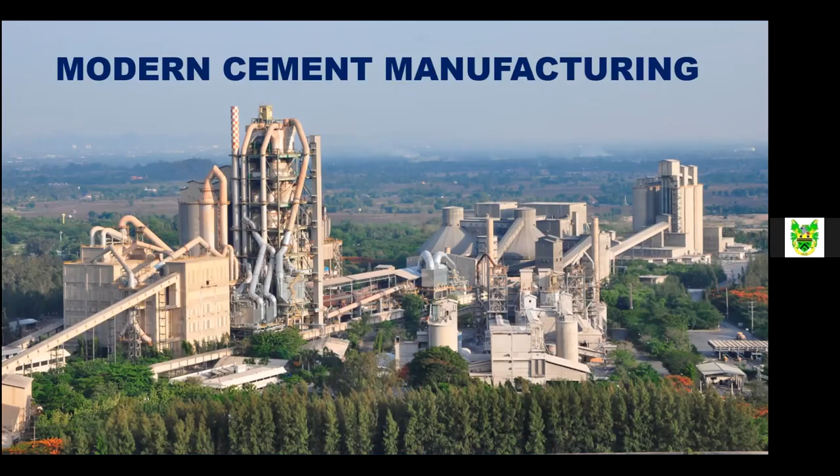Good morning, guys. As Henny says, I've been in this industry for pretty much all my life, 45 years of working. And you're never too old to learn, because I found out the other day from Henny that there are apparently 330 billion particles in 1 kilogram of cement. So I'm learning something new from Henny, thank you, Henny, about that.

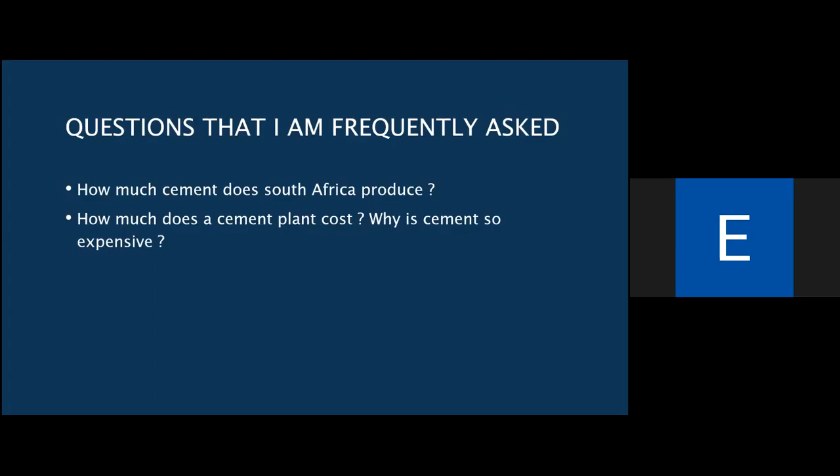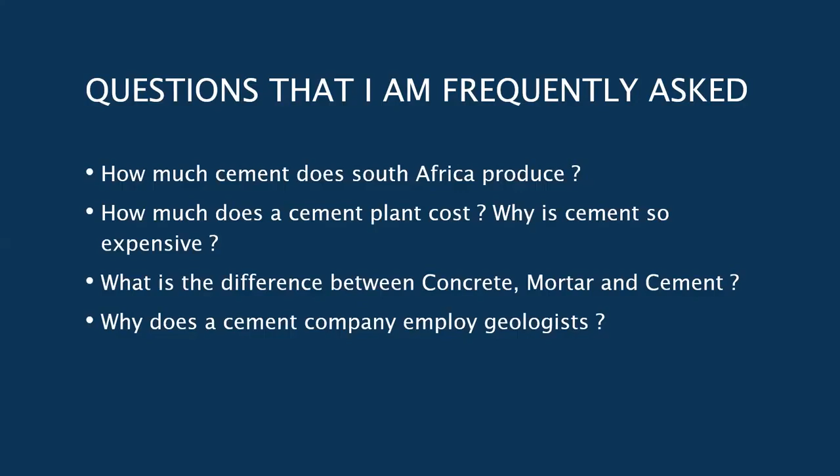So, questions that I'm very often asked. First of all, how much cement does South Africa produce? Secondly, how much does a cement factory cost? And then, really, why is cement so expensive? This question comes because a lot of people feel you simply dig up some limestone, crush it, and sell it as cement, and make one hell of a lot of money. So we'll talk a bit about that today. And then, what is the difference between concrete, mortar, and cement? And finally, a lot of people ask me why a cement company, or cement companies, employ geologists. What has geology got to do with cement? So I'll try and answer those before we run through the process.

How much cement do we produce? Well, South Africa has a cement capacity - I've underlined capacity because not all of this is utilized today, it's an existing capacity - of 21.7 million tons. If we look at that in terms of world production, we're sitting fairly down the line. South Africa's 21.7, we're not too bad, because below us is the United Kingdom at 9.4. But just look at this other guy up here, that's China - it produces huge amounts compared to anybody else. The second is India, which doesn't even come to a third of what China produces.

What does a cement plant cost? Well, the latest figures are it costs 2 billion rand per million tons of capacity output. The last two factories built in South Africa - Sephaku, of which I was part, built in 2014, sits near the Lichtenburg area, produces 2.5 million tons, cost 5 billion rand. And then Mamba Cement, up near Thabazimbi, that cost 2.5 billion rand.

Just as a side issue, Sephaku Cement is 64% owned by Dangote, a Nigerian gentleman. As a story, he, at the age of 21, started a business by borrowing $3,000 from his uncle, and took 3 weeks to pay that back. He is today the wealthiest man in Africa, with a fortune of 14.1 billion US dollars. Not too bad, eh? The other thing is that lead times in the industry are very long.

It takes at least 6 to 9 years from conception of a plant to the completion of it.

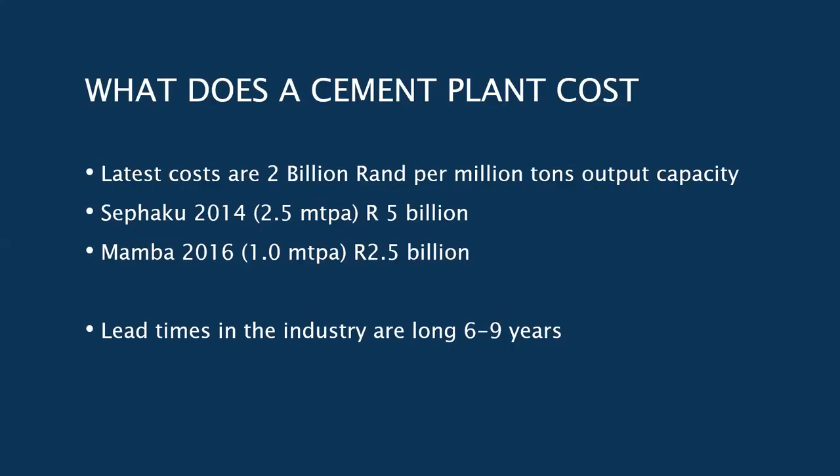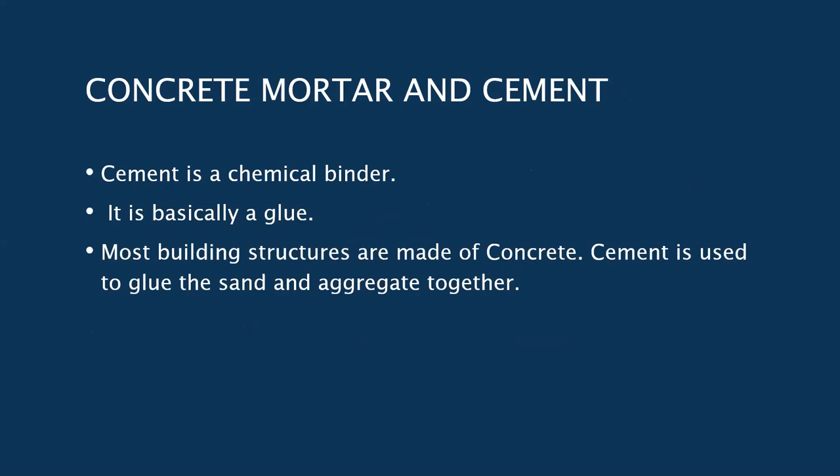The differences between mortar, cement, etc. Bear one thing in mind: cement is just a chemical binder. It's actually purely a glue, that's all it is. All the building structures you see are made of concrete. Cement is just the glue that sticks together the aggregate and the sand. Mortar is just some sand and cement, and again here the cement is purely and utterly the glue that holds them together.

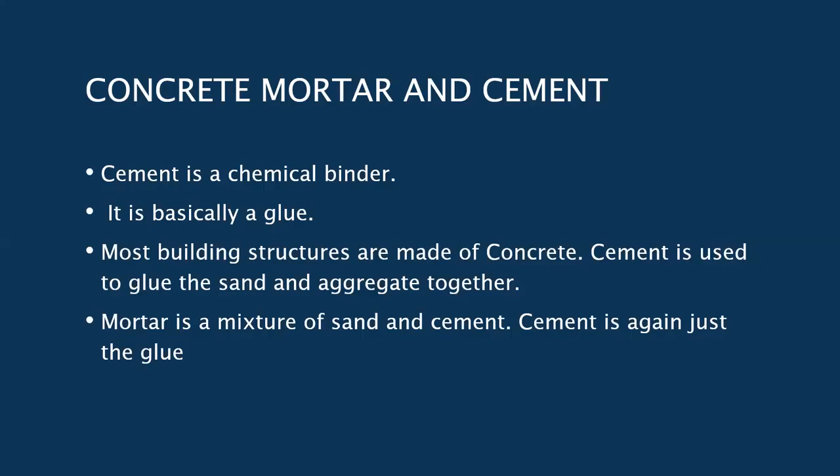So why does a cement company employ geologists? Well, bearing in mind that cement is not something you dig out of the ground—a lot of people seem to think that. They think cement's very expensive because you just dig it out. It's not, it's a manufactured product, manufactured from a whole variety of various raw materials. These raw materials all need to be located, and they all need to be mined, etc.

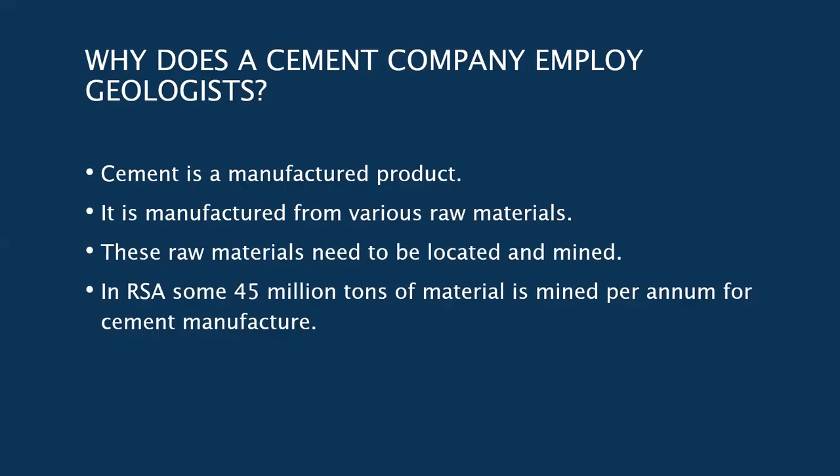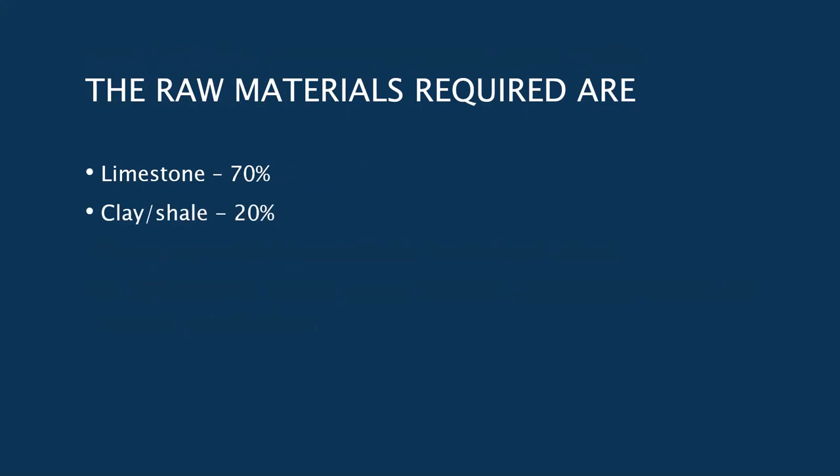In South Africa, about 45 million tons of material is mined every year for cement manufacture. The raw materials we use in cement are limestone, as most people would guess—that's the high proportion, about 70%. Clay, shale, that gives us the alumina component. Iron ore gives us some iron to add to it. Gypsum, and the gypsum is added after the process, I'll discuss that a bit later.

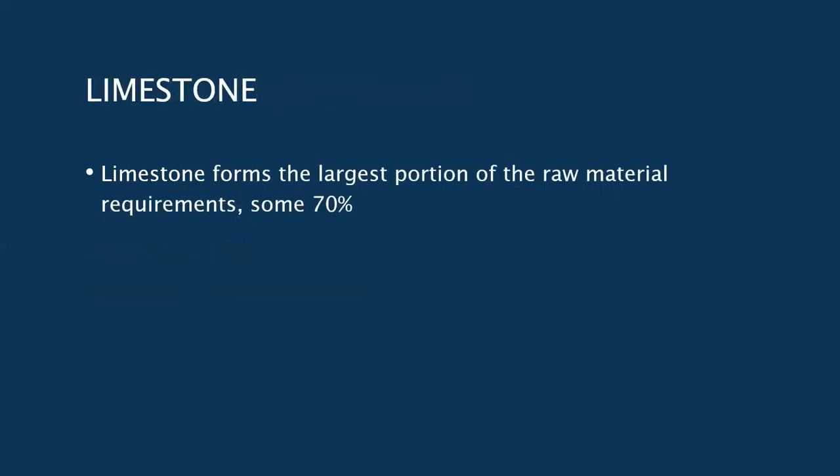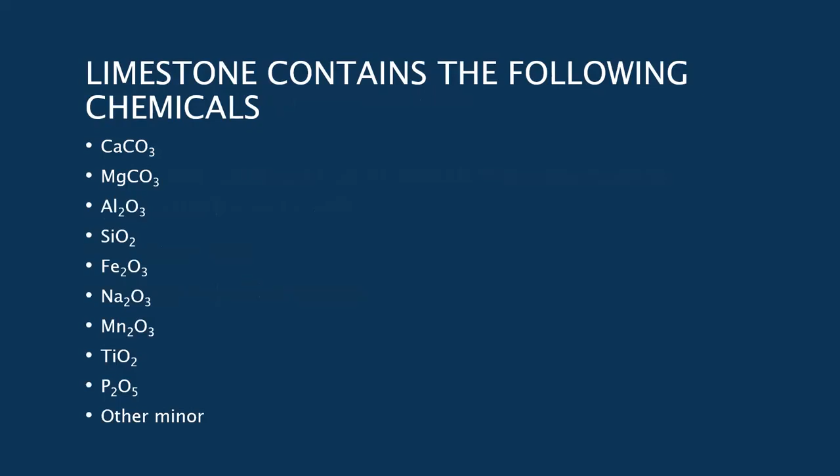Limestone, as you can see, is the largest portion, about 70%. Now limestone is made up of a whole variety of minerals, including calcium, magnesium, alumina, silica, iron, etc., and other minerals. So, as we said, cement manufacture is really a chemical process, and therefore limestone suitability is determined by various chemical ratios and maximums.

Now, the interesting thing here was, at university, my very worst subject by far was chemistry. And yet I've spent the rest of my life in the chemical industry, because everything about cement is chemistry. Geology—nobody cares what you call the thing, as long as the chemistry is correct.

So how do we know what is a good limestone? Very often people think that a high-grade limestone is a great limestone for cement. The answer is no, that's not very much the case. Here we've got the components we're looking at.

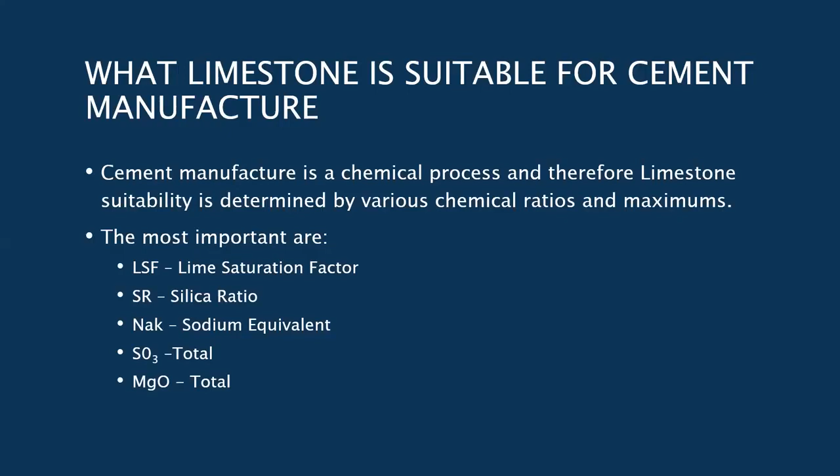In the cement industry, we call something LSF, the lime saturation factor; silica ratio; NaK, the sodium equivalent—I'll discuss these a bit further—and SO3 total. Those are the factors which determine whether the raw materials are suitable for cement.

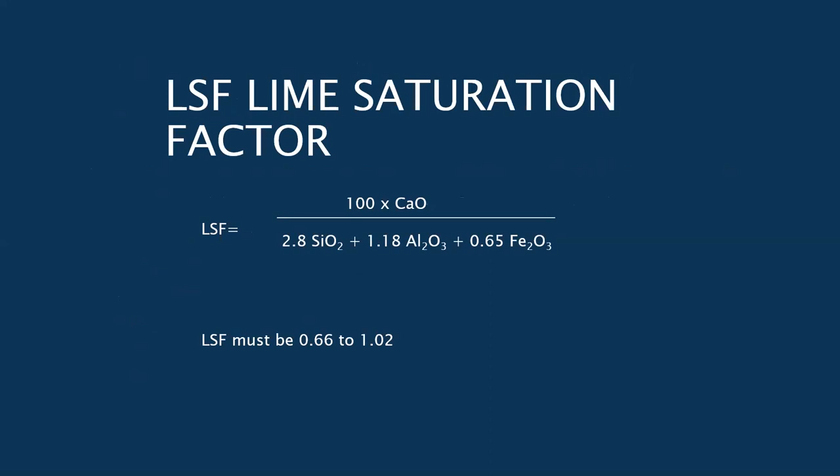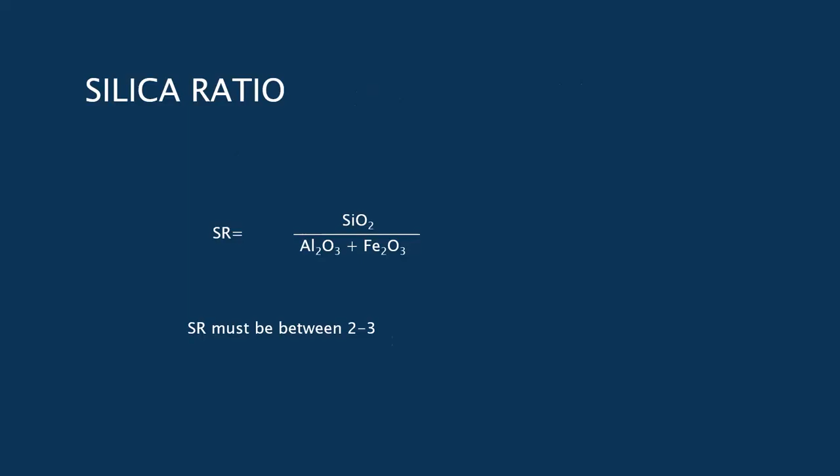Lime saturation factor is calculated by 100 times your CaO over 2.8 times your silica, 1.18 times your alumina, and 0.65 times your iron. We have to control that in the cement industry to between 0.66 and 1.02 in your raw materials. Silica ratio is another thing that needs to be controlled, calculated by your silica over your iron and alumina, and that has to be controlled between 2 and 3.

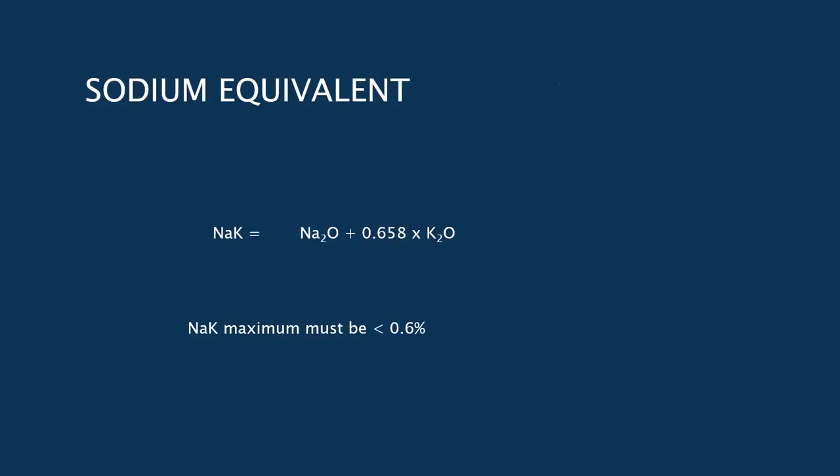Sodium equivalent, this is known in the industry as NaK. It's Na2O plus 0.658 times your K2O. This is a very important thing—your maximum cannot be higher than 0.6%.

If the NaK is higher than 0.6%, then you start getting into an alkaline cement. And as soon as you get into an alkaline cement, there's a good possibility of something called ASR, alkali silica reaction. This reaction occurs between alkaline cement and certain aggregates, not all of them, and it can take sometimes 15 to 20 years to manifest.

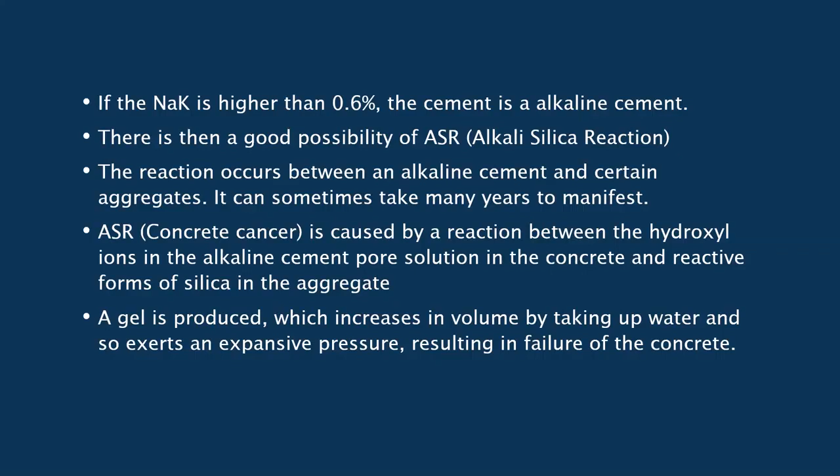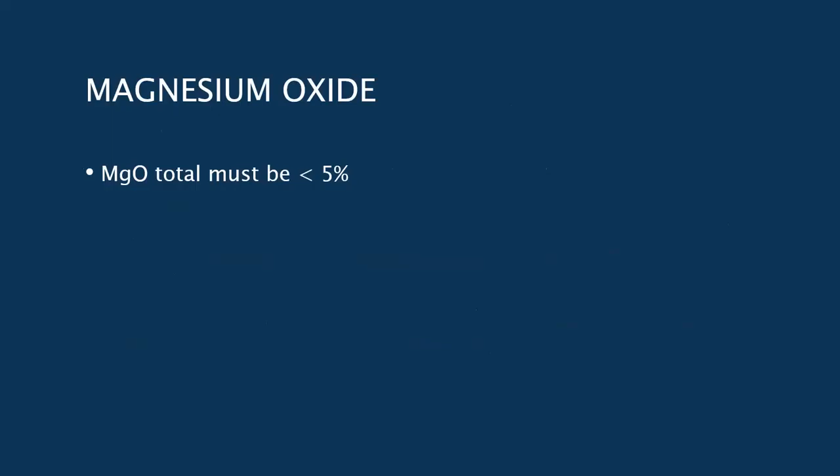SO3 we've got to keep at less than 3.3%. Magnesium oxide has got to be kept below 5%. So you see there's a heck of a lot of control in what we consider to be cement grade limestone.

Let's have a look now at the cement manufacturing process. Cement plants can be quite large. A lot of people see a little blending plant down the road and think that is a cement plant, but it's not the case. Cement plants are quite big and expensive.

The cement process can be broken up into four basic components: raw material processing, which is the side I was involved in, raw meal processing, clinker processing, and cement milling. Starting off with the raw material.

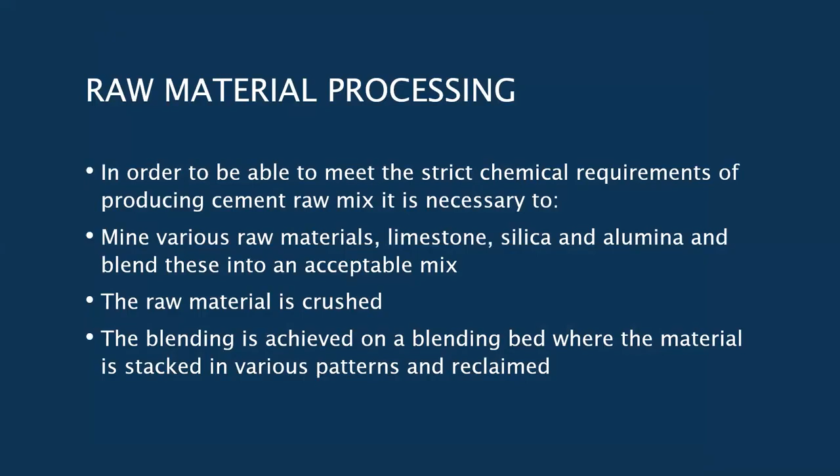In order to meet the requirements we've discussed, it's often necessary to run quite a few different mining operations simultaneously. You need to mine limestone, get some silica, get alumina, and all this material is then crushed and blended to try and meet those requirements.

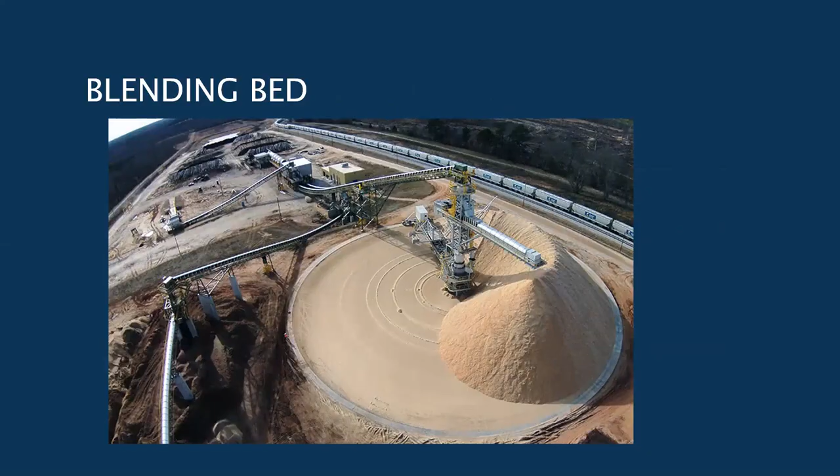The blending is done in blending beds, where the material is stacked in windrows, up and down the whole time, and it is then reclaimed at right angles to that. All of this is trying to blend out the variations, and you'll see this throughout the cement plant, almost everything is designed to eliminate variability in quality.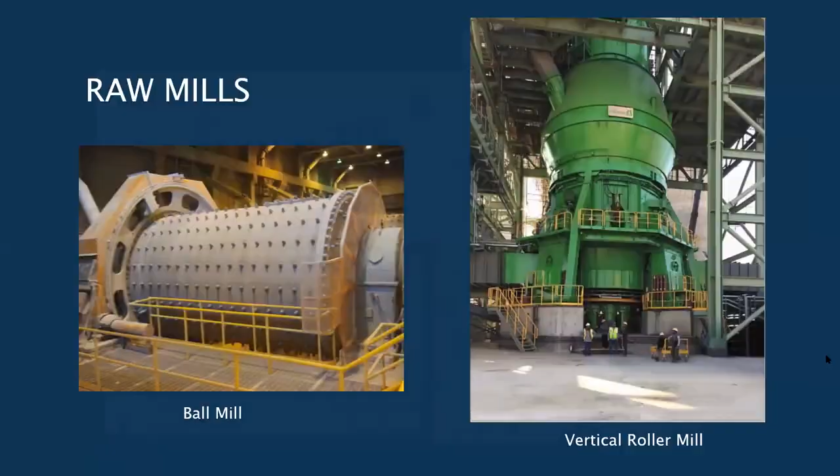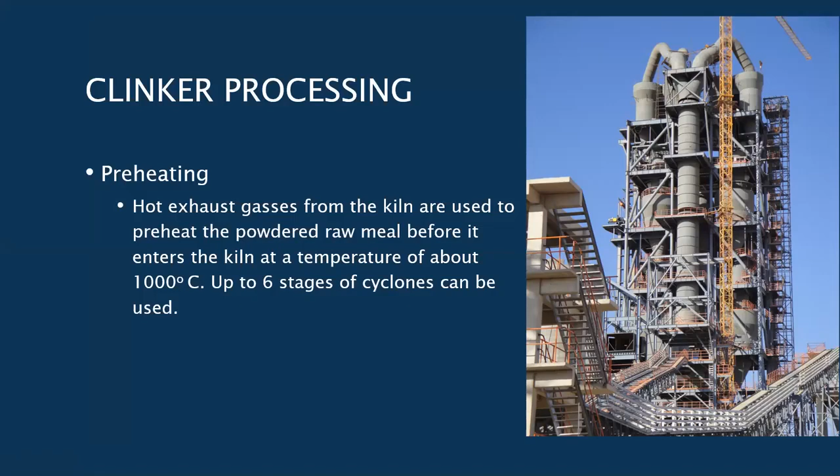Clinker processing is when the cooking process starts. First we have preheating. When I joined the industry, there was nothing like a preheater. Today these preheaters are used to gather what used to be waste heat, using it to heat the fine powder to about 1,000 degrees even before it enters the kiln. This is the kiln at the bottom, and there's the preheater. The powder comes down here and is heated to about 1,000 degrees before entering the tube, which is the kiln.

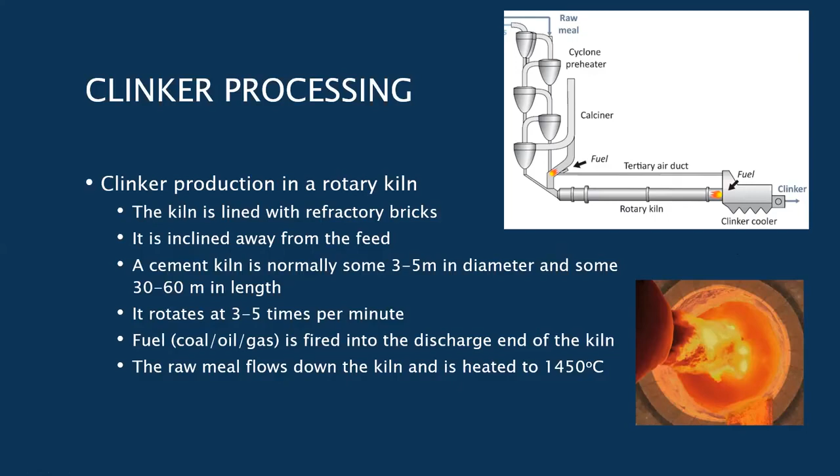The kiln is lined with refractory bricks and is inclined away from the feed. A cement kiln is typically 3 to 5 meters in diameter and some 30 to 60 meters in length. It rotates quite slowly at about 3 to 5 times a minute, and is fueled at the bottom by either coal, oil, or gas—in South Africa mainly pulverized coal. This is blown into the kiln and creates a huge flame, as seen in the bottom right corner. The raw meal, fed in the other end, flows slowly down this kiln and gets heated up to 1,450 degrees centigrade. You can get an idea of the size by the humans standing here.

What happens in that clinkering process? The first thing that happens is that between 1,000 and 1300 degrees, water evaporation and calcining occurs—this is the loss of CO2, carbon dioxide, which we'll talk about later. Between 1300 and 1450, you get the formation of very unstable compounds called alites and belites, which react differently in the longer or short term in the cement. I don't want to go into that too much detail.

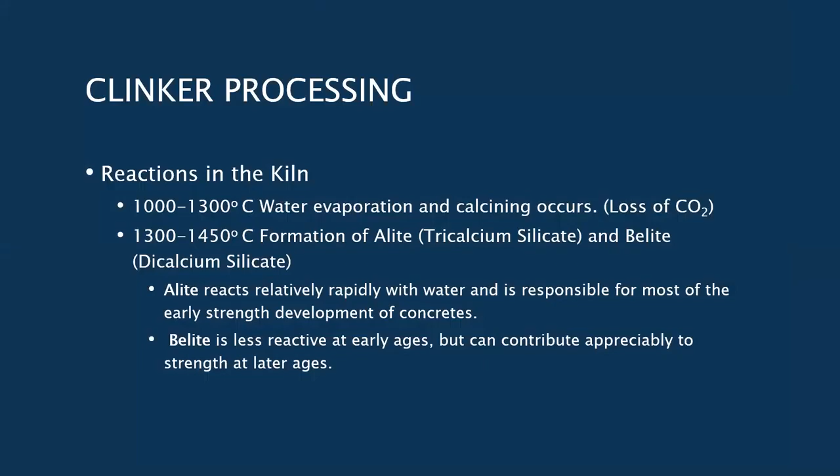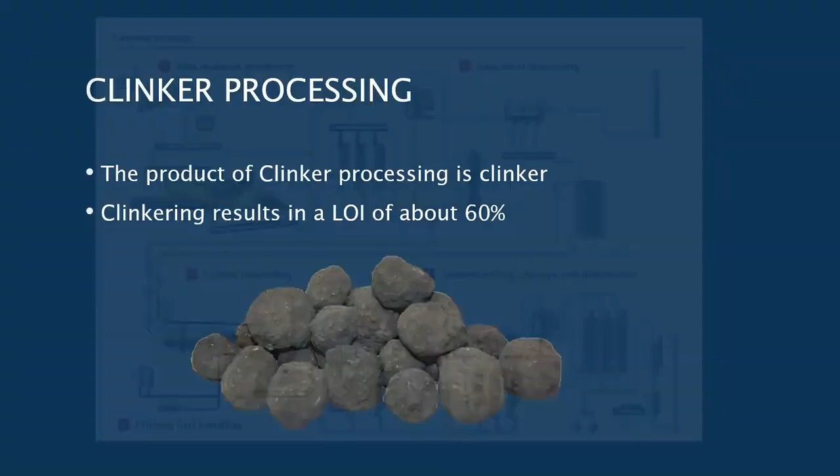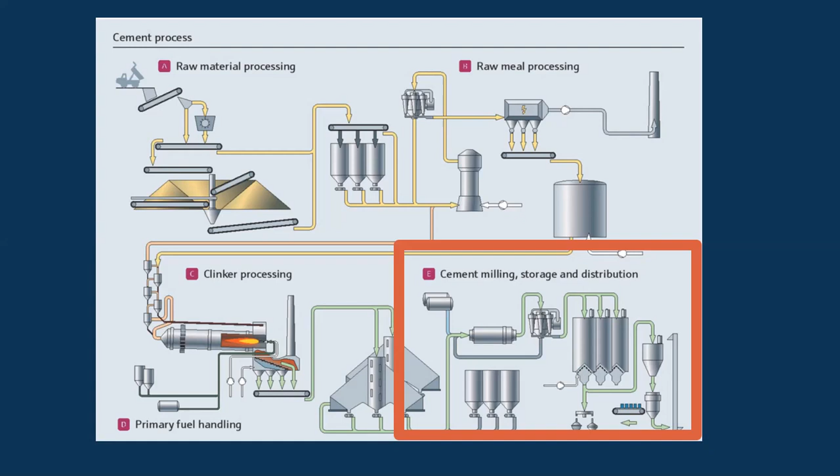We move now to the final process, which is milling and storage. Between those two processes, you've now lost 60% by volume. So you do not want to put your clinkering process far away from your raw materials, because it means you're going to lose 60% of the material by CO2. Once you have clinkered the material, you've lost that, and you can now transport it. So very often your clinkering process and your milling process are located in separate areas or miles apart.

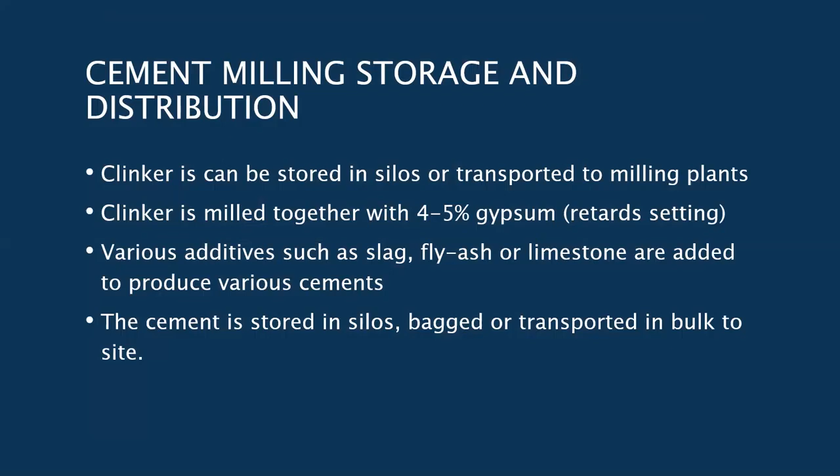Your clinker can be stored and transported, and now they add 4 to 5% gypsum to it when they mill it, and this retards the setting. Otherwise, you often get flash setting in cement, and you can't really mix it. We now have a variety of additives that can be added to this, such as fly ash and limestone, and they're all extenders — they extend the volume of the cement.

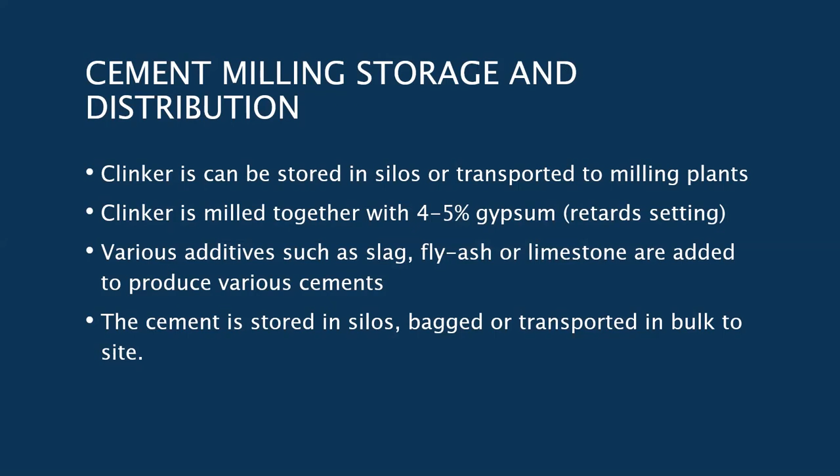I want to touch very briefly on some of the changes and improvements that have happened over the last 45 years of my life. First of all, we'll look at CO2 emissions. This is quite a scary thing, because it's 900 kilograms of CO2 per ton of cement. I think the cement industry is one of the worst producers of CO2.

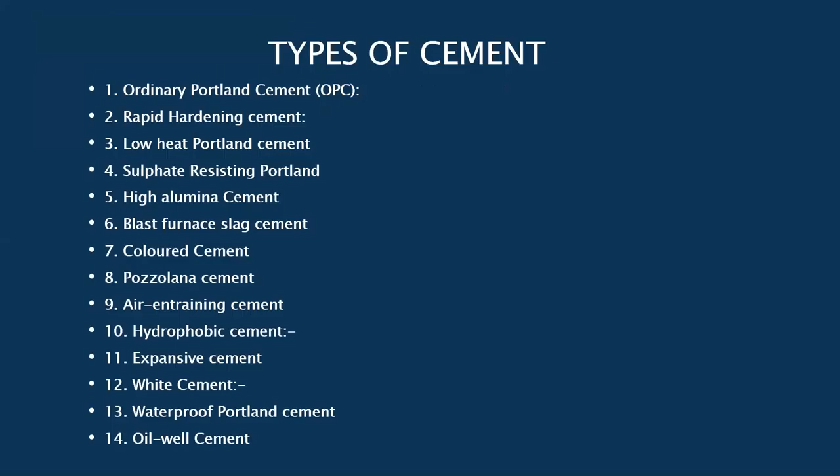So a lot of blending has happened. When I started in the industry, there was an OPC — a cement — that was it. Today, there are a whole variety of blended cements, all aimed at reducing the amount of actual CO2 in the final product. These are the list of about 14 different types of cement available today, all with admixtures in them.

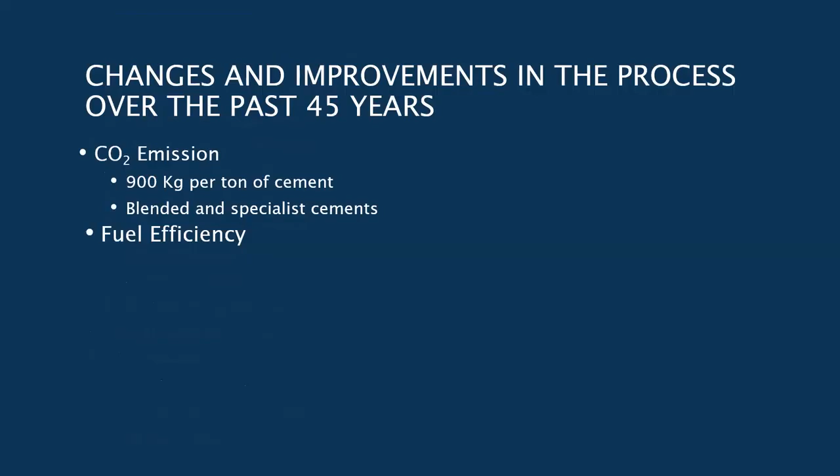Fuel efficiency is the thing that's really taken off. When I started, there were what was called wet kilns. Wet kilns meant the raw material was slurried into a slurry and pumped into the kiln, and of course you had to then dry off the water, which made those kilns very, very inefficient. Then they switched to dry kilns, which were far more efficient.

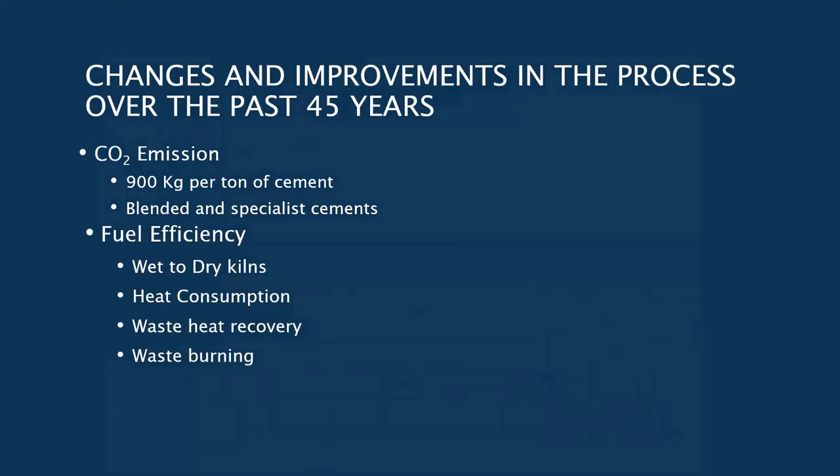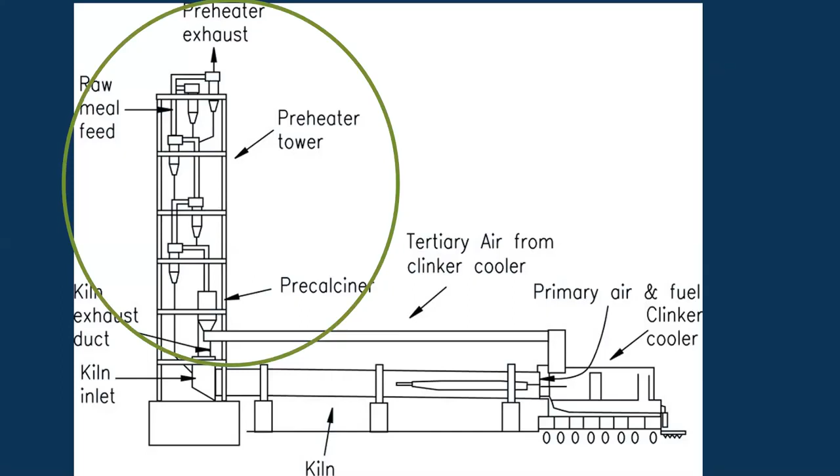So the heat consumption, and a lot of work has been done today on the waste heat, which used to go to waste — now it's all being recovered. We'll touch on that a little bit. A lot of work has also gone recently into burning waste products. So if that is our kiln down the bottom here and our preheater on the left, most of the work in the last 40 years has gone into this side, the left-hand side — the preheating and the use of that to not lose that amount of energy.

If you look at the energy consumption in gigajoules per ton of clinker over the past — initially we had wet kilns on the left, you can see they were using a huge amount of energy. Then it went to semi-dry, the preheater started improving, and on the very right-hand side we've now got a fairly modern kiln. So you can see there's a huge saving in energy that has gone into the production of cement.

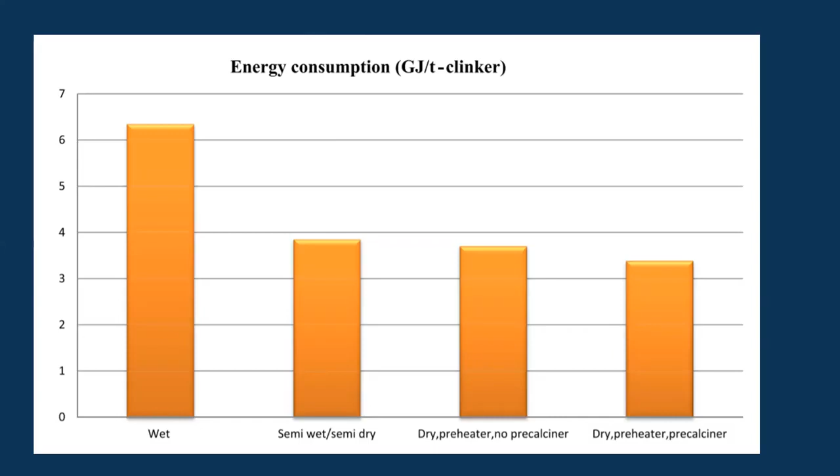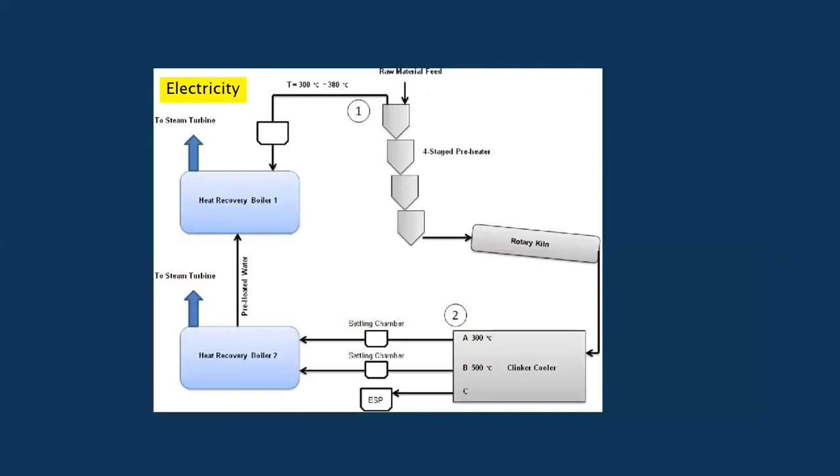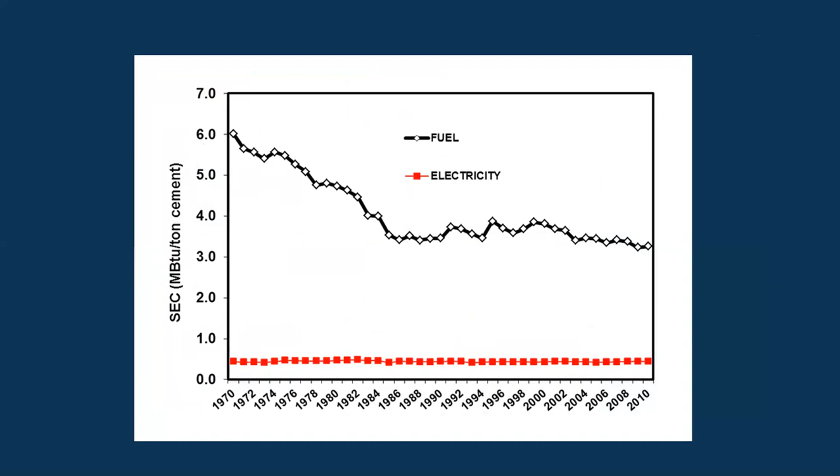The other thing that has come in relatively recently is the ability to recover the heat and put it through boilers to generate electricity, feeding it back into the plant. All this is in terms of trying to recover as much energy as you can out of your coal. If you look since 1970, you can see the improvement in the fuel efficiency of the modern kiln.

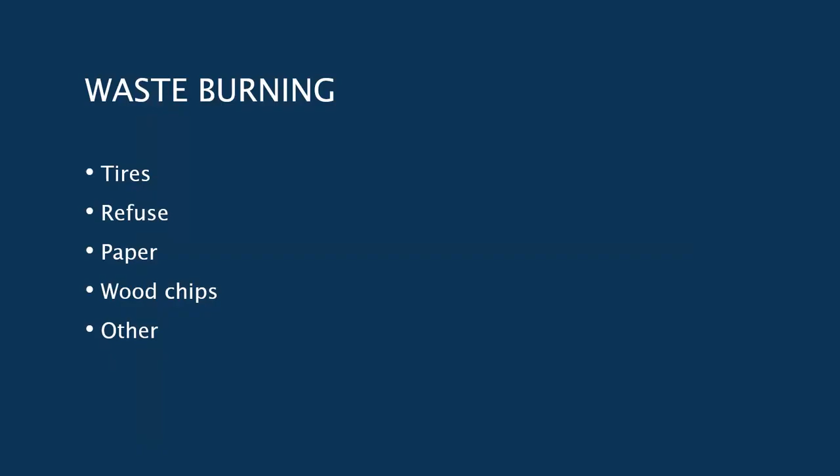Waste burning — I just want to touch on this very briefly — and that is the use in the industry of things like tires, refuse, anything that has a calorific value, paper, wood chips, and others. One of the more interesting ones that I can maybe mention to you is this one, which I came across.